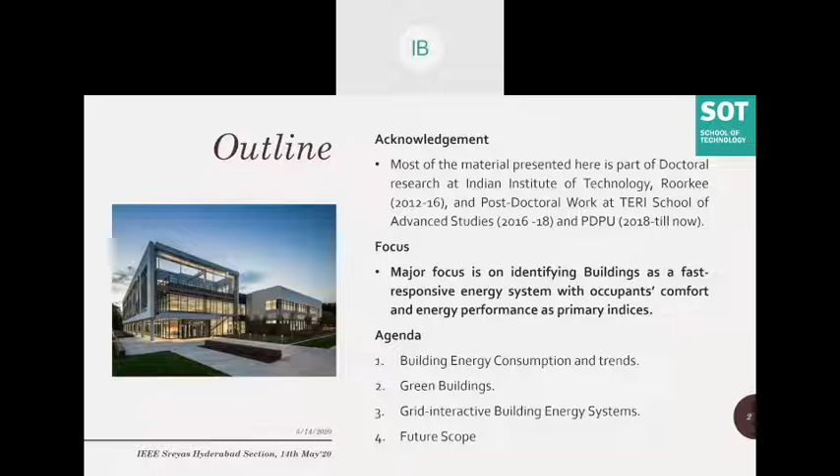I shall be focusing on how the buildings as an entity be regarded as a responsive entity to regulate power in an electrical power system. We shall look into the energy usage trends for building sector, buildings as an energy sector, from the reports published by several agencies like Union Ministry of Power, Bureau of Energy Efficiency, TERI, MNRE, so on and so forth.

Now, from this, the statistic majorly shows that the buildings, along with the construction sector, accounts for nearly 40% of the total energy-related CO2 emissions and about 36% of the final energy use worldwide. That means that the buildings as a sector offers the largest cost-effective greenhouse gas mitigation potential with net cost savings and economic gains possible through the implementation of existing technologies, futuristic technologies, policies, and also the building designs.

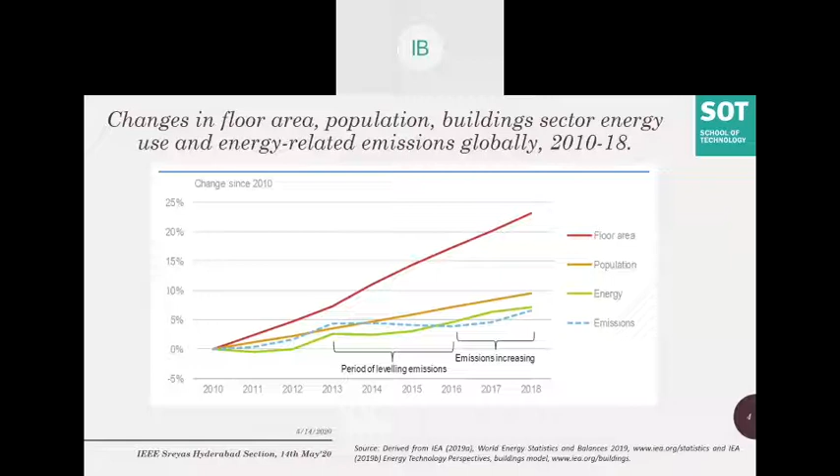Now, a major source of rising energy use, and also hence the GHG emissions by the global building stock, is electricity, the use of which has increased more than 19% since 2010, generated majorly from coal and natural gas.

This is why we have put this figure. It indicates how crucial it is to make clean and renewable sources of energy accessible when it comes to buildings, and also to use passive and low energy designs more widely in the building sector.

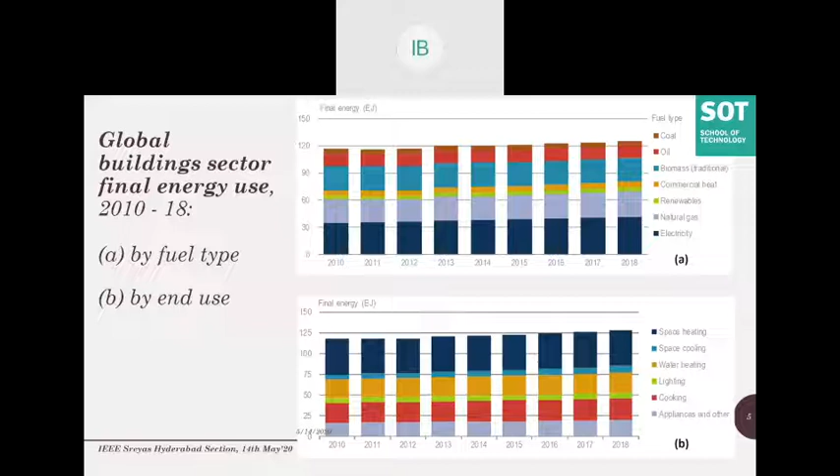Renewables include solar thermal technologies as well as modern biomass, for example wooden pellets and biogas. Hence the traditional biomass and renewables are shown differently here.

Now from 2000, if we see here what services have been asking for more energy usage, electricity usage, from 2017 to 2018 the energy intensity continued to improve for space heating and lighting, but increased for space cooling and remained steady for water heating, cooking, and appliances.

With around an 8% increase in 2018, space cooling became the fastest growing use of energy in buildings since 2010, though it accounted for only a small portion of total demand at 6%. That means space cooling requires us to look into the air conditioning aspect.

Globally, greater end-use energy consumption due to significantly higher electricity use since 2010 for space cooling, appliances, and hot water is resulting in increased GHG emissions also.

Although space heating, water heating, and cooking continue to be the primary energy end use demand in the buildings energy sector globally, the fastest growing end uses are still space cooling, appliances, and other pluggable loads.

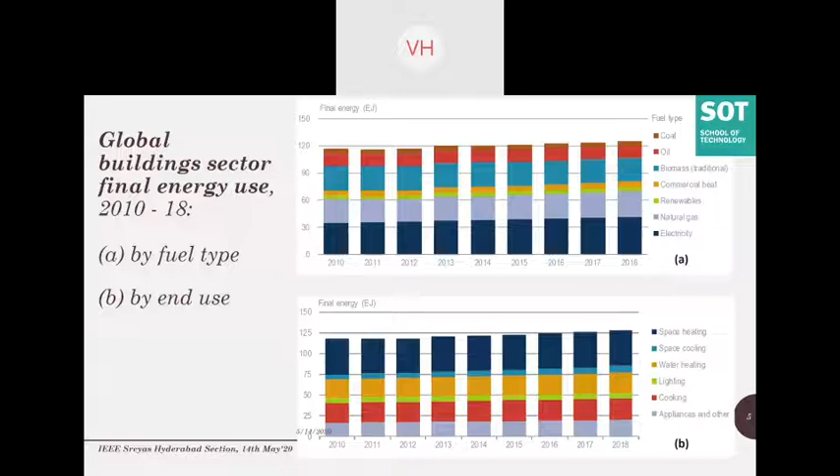Now, owing to technological improvements, which we see in advertisements as well, and also policy supports, technologies are coming at handy, and costs are also reducing as per the market. Energy Efficiency Services Limited (EESL) has also been working extensively in getting energy efficient products to consumers, especially in rural areas as well.

The overall reductions have been made in energy intensity for space heating, lighting, appliances, cooking, and water heating. This means that energy efficient green building systems and also building designs and envelopes continue to limit growth in both residential and non-residential building energy use.

So what we have learned so far: first, that the building sector accounts for around 36 to 40% of total energy use and 30 to 35% of total GHG emissions.

Second, these energy use and emissions are increasing. Third, such increases were driven by strong floor area expansion and population expansion and the improved standard of living, while efficiency improvements are continuing, but they are not adequate to outpace the demand growth.

Fourth, out of all the services a building can provide, space cooling energy intensity has increased as a result of greater cooling demand in hot and humid regions. Fifth, lighting demand has increased due to increase in floor area.

So the two major services, or the equipment and appliances that need to be worked on, are the heating, ventilation, and air conditioning system, which is HVAC, and the lighting system and pluggable loads. Now we will jump into the green buildings aspect.

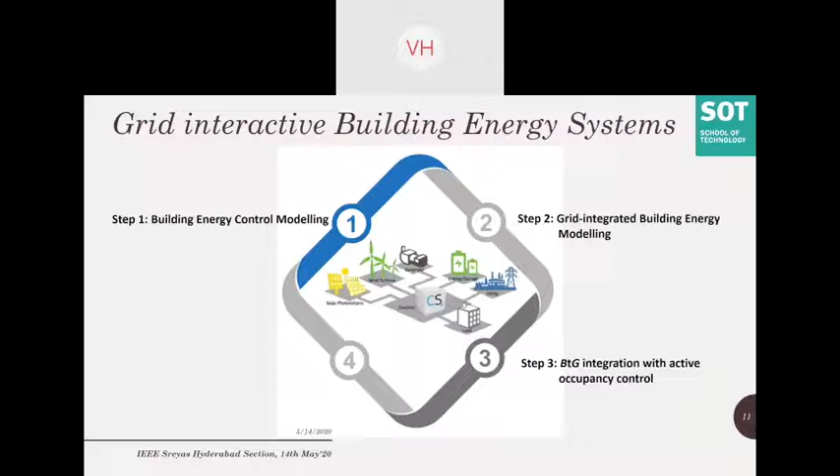Development of building energy models are of three types: one is white box modeling, second is black box modeling, and third is gray box model. Any energy system mathematical model is developed using some mathematical equation which governs the behavior of that system.

You take some input variables, categorize those variables as controllable and uncontrollable, give it to the energy system, and see the response or output. A white box model means you know each and every part, sub-part of the system you are developing. Each and every transfer equation is there, and you use detailed analytical tools to solve the models and get the output.

Black box models are what undergraduate and postgraduate students do in laboratories doing experiments. They don't know about the system, they only know there is a box. You give certain inputs, do experiments, change the value of inputs, develop a table for outputs for those inputs, use regression or other data analysis, and get the equations of the model. That model is called a black box model, hence the name black—meaning you are not able to see anything about the system.

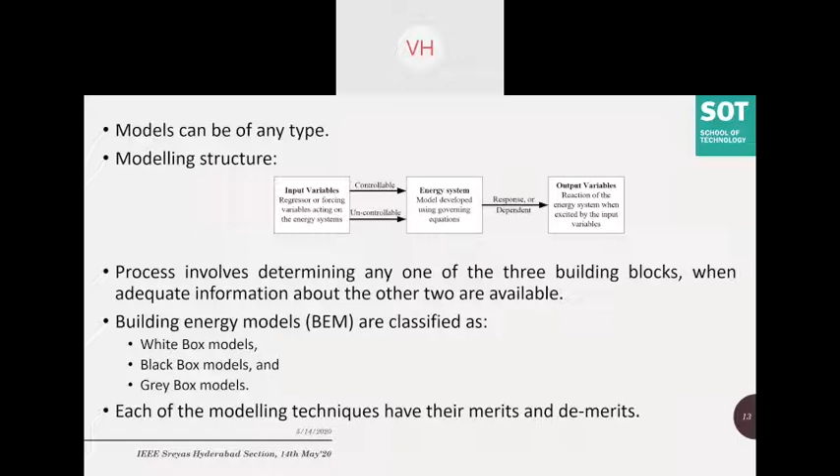It's not that we don't have simulation programs. We have simulation programs, softwares available, both open source and commercial building energy simulation software. Selecting a building energy simulation program depends majorly on the functionality of the building energy study.

If the software is used to design a residential building, is it single zonal or multi-zonal, a commercial complex, a municipal building, a library or a gym, and so on. Also important is how many times you have to use it—the precision of the model—and how much experience the modeler has. For example, I may have experience with certain software, and I want to replicate the same knowledge in other simulation software, depending on how experienced I am.

Also relevant is what hardware and controlling techniques are used—maybe connecting it to a Raspberry Pi board or Arduino board, or to the Internet of Things (IoT). There are very famous energy simulation programs: Energy Plus, eQuest, ESP-r, TRNSYS, and we can use other mathematical simulation softwares if we want to develop white box models, such as Python and MATLAB, and so on and so forth.

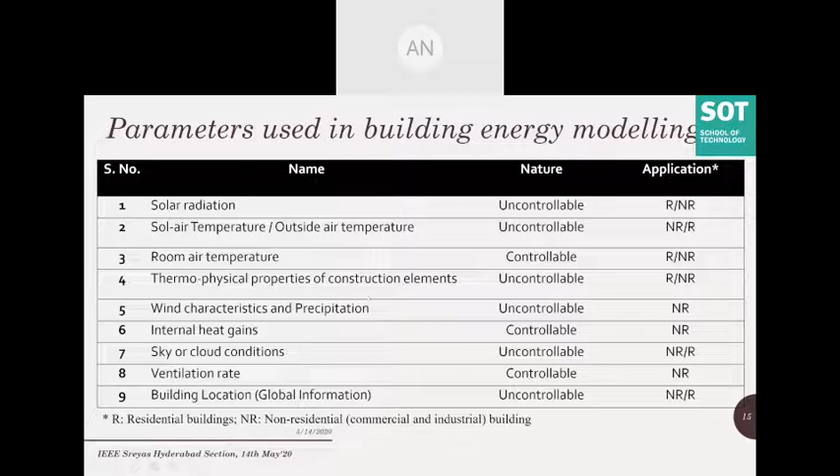Now what I have done is I have used electrical networks, resistance capacitance networks, simple networks which you must have studied in your network theory first or second year course. I have taken temperature to be analogous to voltage and heat flow rate to be analogous to current. Why? Because by natural law, heat flows from a higher temperature region to a lower temperature region, similar to electric current which flows from a higher potential point to a lower potential point. This is the law I have used to develop the thermal electrical analogy and hence the network.

It's not that models are not available. Literature gives us models, but there are certain gaps that I have identified. One of the major gaps has been in structure and accuracy. One major gap has been in parameter selection and its influence. What happens is, because of the gap between the mechanical, electrical, civil, and architectural parts, if we are developing an electrical control system, the models we use are single order models because they are easy to model and get very fast response.

But it loses accuracy. For parameter selection, what we have done is the values of R's and C's, resistances and capacitances, have been equally and uniformly divided depending upon the total thermal resistance and the total thermal capacity.

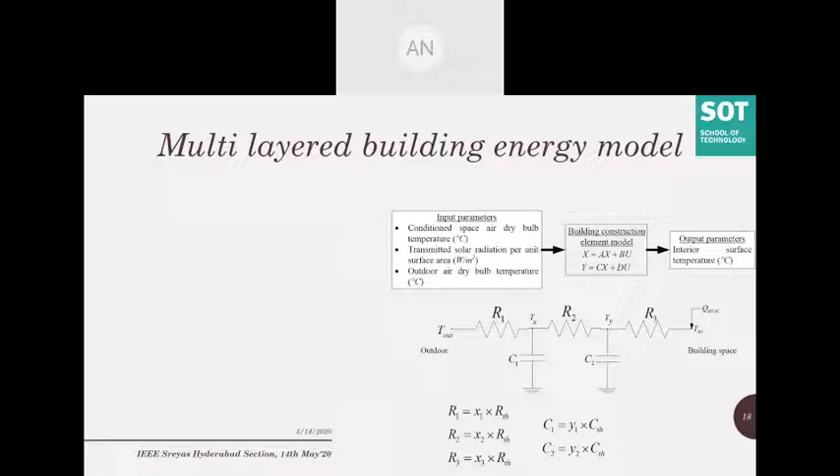What building layer, multi-layered building energy model I have developed as a second order model. As you can see, if you develop the ordinary differential equations, this is something you would have studied in your third semester numerical methods as undergraduate students. It's pretty easy. What we have done is for one building wall,

it's only one wall, one construction element. We have modeled it as a 3R, 3 resistance and 2 capacitance model. The values of these resistances are fractions of the total thermal resistance and total thermal capacitance. Total thermal resistance depends upon the physical property of the building construction element. Similarly, total thermal capacitance depends upon the thickness, density, and specific thermal capacity of the particular layer. As I said, layers can be thermal insulation, brick, air gaps, and also thermal paint or insulation.

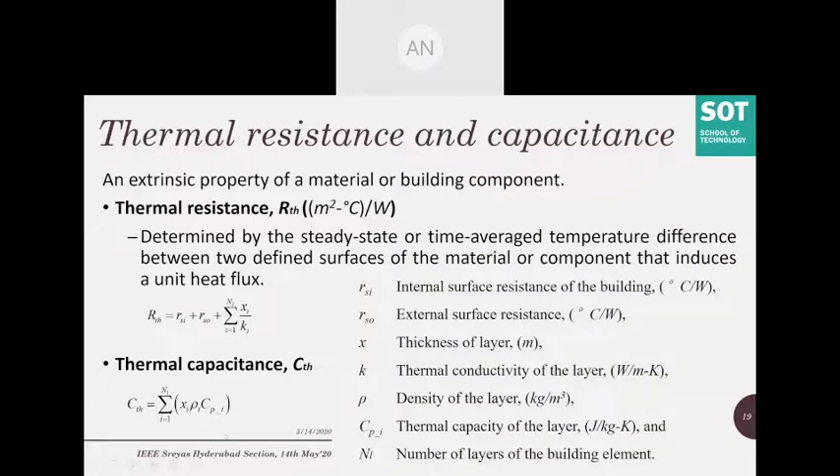Now, what I have done is I know the value of RTH, which I can get because the architect will give me all these values. So I know the RTH value, I know the CTH value.

I just want to know the X's and the Y's. Now, as I have already outlined in the gap, it's easy that I make this as 1 by 3, 1 by 3, 1 by 3, and Y as 1 by 2, 1 by 2. But this does not replicate the complete behavior of that construction element.

So what we have done is we have developed an optimization algorithm that would give us the fraction these X's and the fraction these Y's. Now, having developed a building wall model, the same approach is used for other walls of the building, depending upon how they are exposed to the outdoor environment. It is imperative that we develop a model for a heating, ventilation, and air conditioning system.

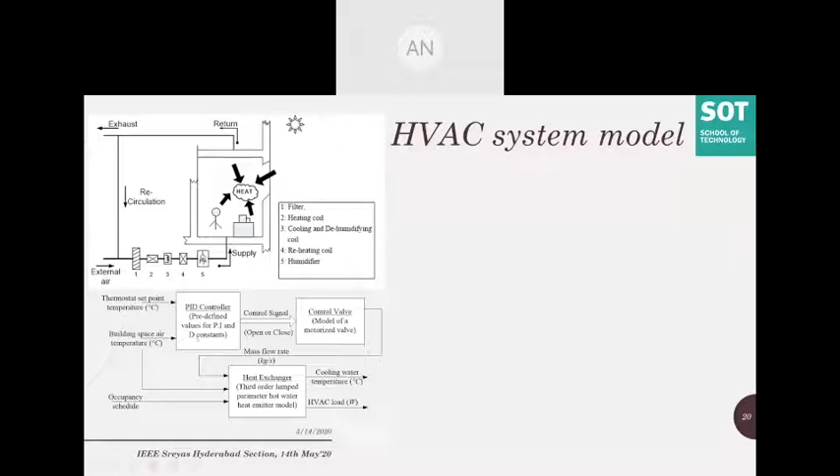The model that I have worked on is a heat exchanger third order lumped parameter model and a control valve model. And the control is being controlled by the signal given from a PID controller. The PID controllers are traditionally used and still now they are being put in use. The only thing is how you are tuning the values of KP, KI, and KD is depending upon the artificial intelligence techniques or the techniques that are being used nowadays.

I have used the traditional method, and the output that I am getting is, as you can see, the HVAC system will give the building space ventilation and infiltration air change rate. This is nothing but a mathematical expression which will tell me how much cooling with good ventilation can be provided out of an HVAC system.

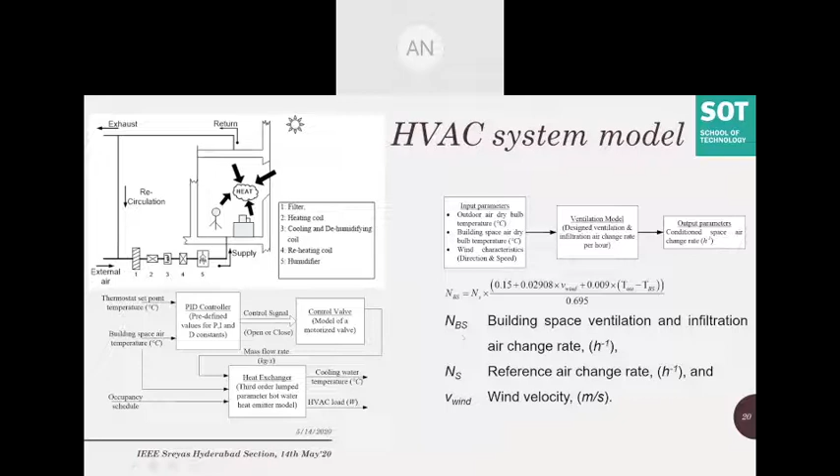So what I have done is we didn't do any experimental hardware analysis, but I have taken the ASHRAE, American Society of Heating, Refrigeration and Air Conditioning Engineers Handbook. I have taken a test case. These are the parameters that I have taken. They have test cases, and this is the parameter that I have taken for the HVAC system and developed my model.

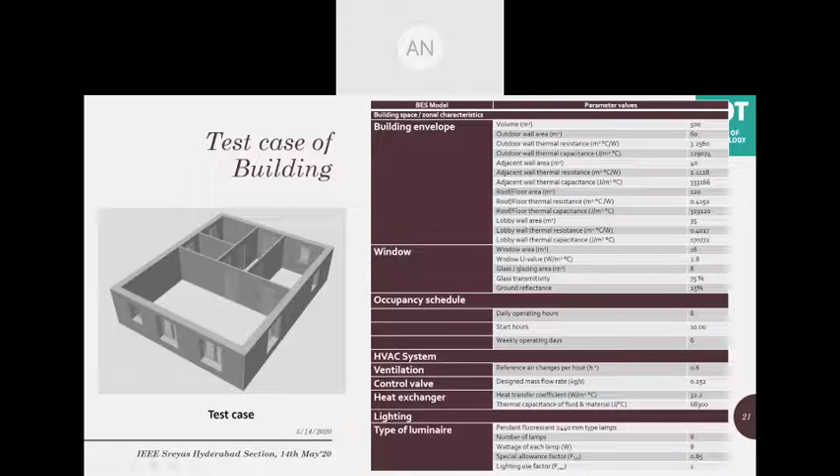Now for a white box model, I have used finite difference formulation for a single dimensional Fourier heat conduction equation. I have used the Crank-Nicolson method, which uses the central difference scheme to solve this model.

This is a white box model. This is a larger order model and requires a larger computational demand. This model is reduced to a second order model, and as you all know, a second order 3R2C model is widely used.

Because we know we can get the performance characteristics in terms of peak time, settling time, rise time, maximum overshoot, and the steady state error. That means we can give a step input, impulse input, ramp input, or sinusoidal input, depending upon what you want to model and get the outputs. And that's why I have chosen the second order model.

How much time do I have left? Sir, you have 23 more minutes. How many minutes? 23 minutes, sir. Okay, thank you.

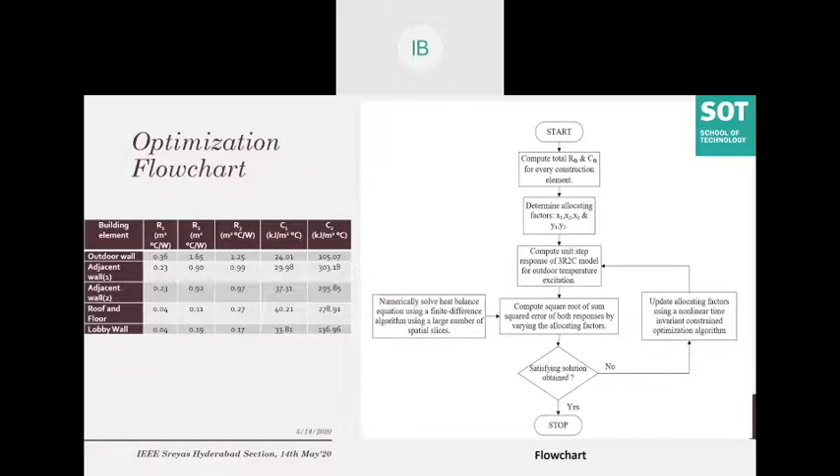Now the optimization algorithm, which we have modeled, takes into account the error function. What I will do is I will give an input here. I don't know the value, so I will start with a guess value of x1, x2, x3, and a guess value of y1 and y2, and get the values of r1, r2, r3, c1, c2 from these expressions.

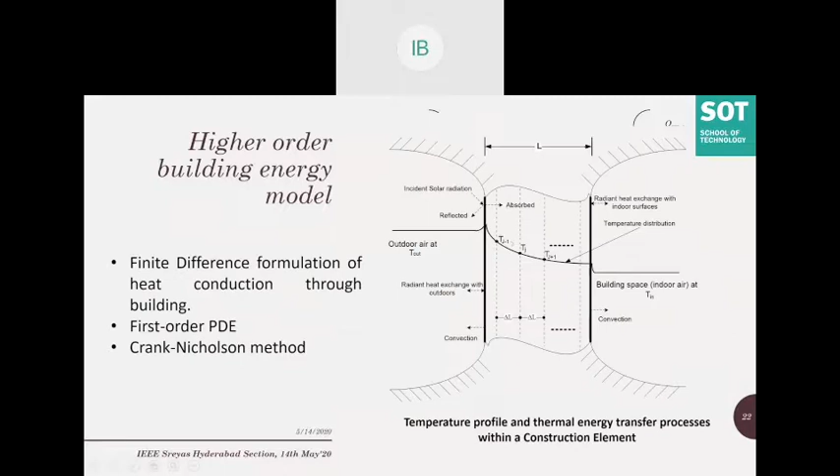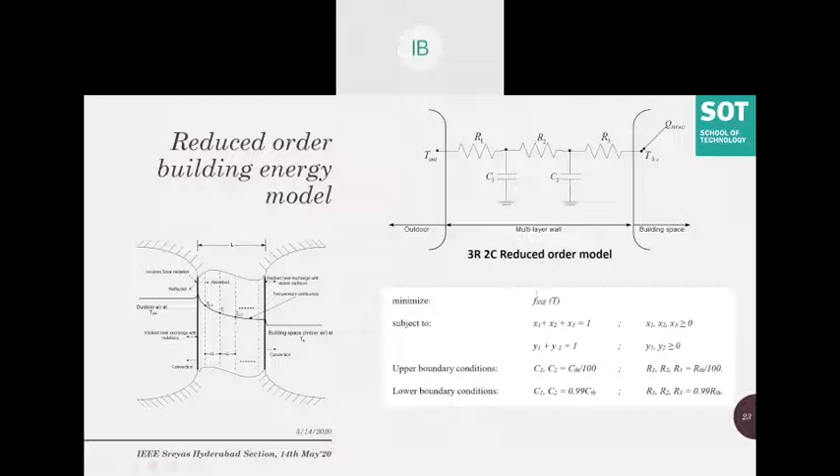And then the same input will be given to this model. The output will be recorded here. The outputs of both the models, the square root of the sum squared error of both the outputs, will be taken and reduced by taking into account an optimization algorithm.

Now that optimization algorithm has fetched us, for my building model, all the values of R's and all the values of C. Actually, it has fetched x1, x2, x3 and y1, y2. Multiplying that for a particular RTH that I have taken from the ASHRAE Handbook of Fundamentals, we get the values of R's and C's. Now this algorithm I have done for one wall, mind you, this is for one wall.

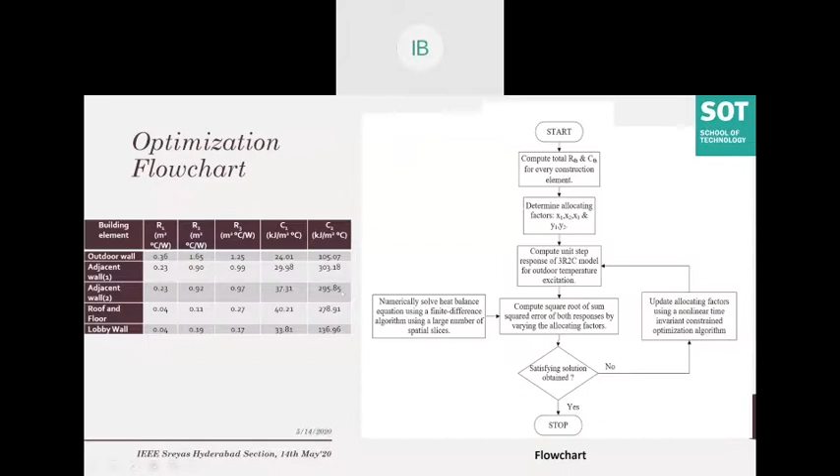So one second order model is for one wall. And as I request you again to look around, you know that you are sitting inside a cuboid like this, with a couple of windows and solar radiation.

And that means that we have a 3R2C model. A 3R2C model for a roof, for an external wall, for a lobby, for a floor, for two adjacent walls. And a window I have taken as a purely resistance and a single capacitance model, because a large amount of solar radiation comes inside due to the glass effect. And an internal mass, meaning computers inside, occupant-based equipment which would contribute to the thermal mass inside your building, and a capacitance of the air. So this would give us the temperature of the building space inside the room that we are sitting.

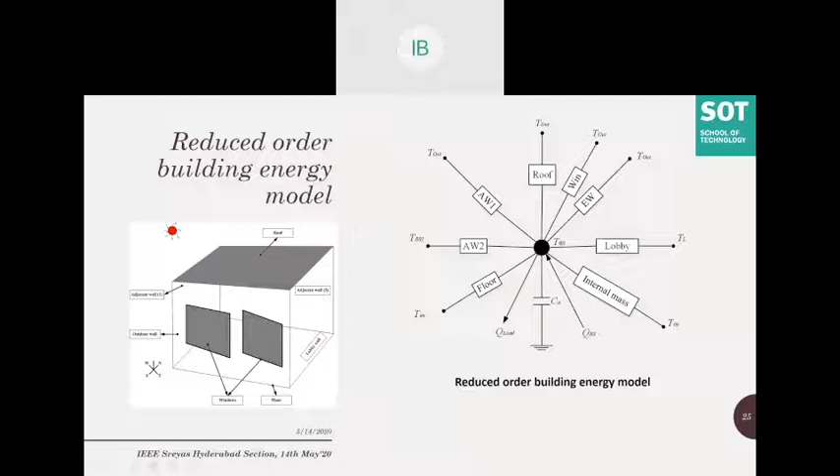Now, having developed the model, I have run it for one month, for one summer season, for one winter season, and also for one year. And I have calculated the energy consumption for all these time parameters that I have outlined.

Now it's time that we develop comfort analysis. I've taken into account the thermal comfort, which is dependent upon the indoor air temperature; the visual comfort, which depends upon the lux values or illumination level; and the indoor air quality, which depends upon the ppm concentration of CO2. The formulas I have taken are empirical, as I told you—no experiment was carried out. These are empirical analyses taken from the ASHRAE's book, and I have calculated the overall comfort of the occupants inside the building space that I have modeled here.

Similarly, I have calculated the energy consumption analysis. Now, the major point here is it becomes a multi-objective optimization. Why? Because you want to minimize the energy being consumed by the lighting system and by the HVAC, but without jeopardizing the comfort of the occupants. This is where the major scenario comes in.

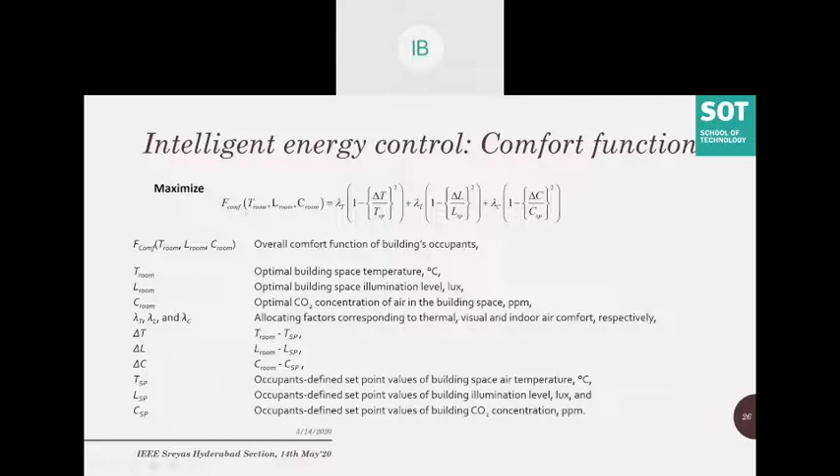If you would see, I have modeled the occupant's comfort inside the optimization algorithm as a discomfort model. So it becomes maximization of comfort, which becomes minimization of discomfort, and minimization of energy. You could see that we will get a Pareto front solution, because whenever you model a multi-objective optimization algorithm, there will never be a single solution—there will be sample solutions that we get.

For sample solutions, you can provide them to the consumer, and the consumer itself will take into consideration: okay, now I want more comfort, so my setting will be this; no, I don't need much more comfort, so my setting would be this. That means, just as we have a regulator for fans, can we have a regulator or controller that would control the thermostat setting, the illumination index, and also the CO2 concentration?

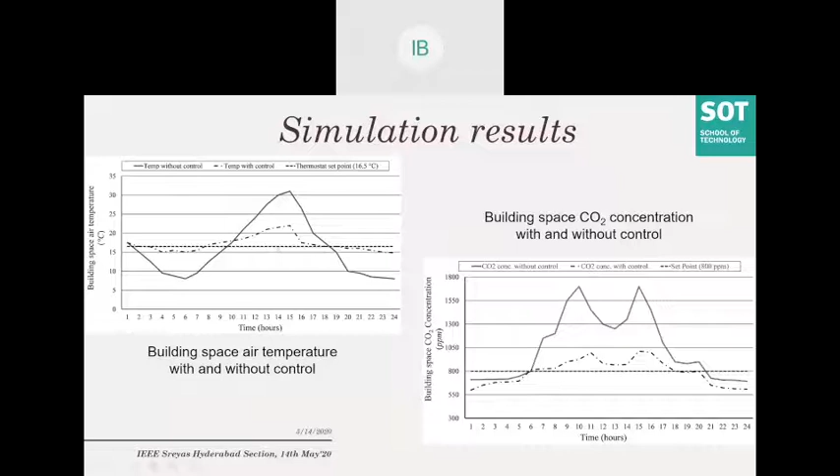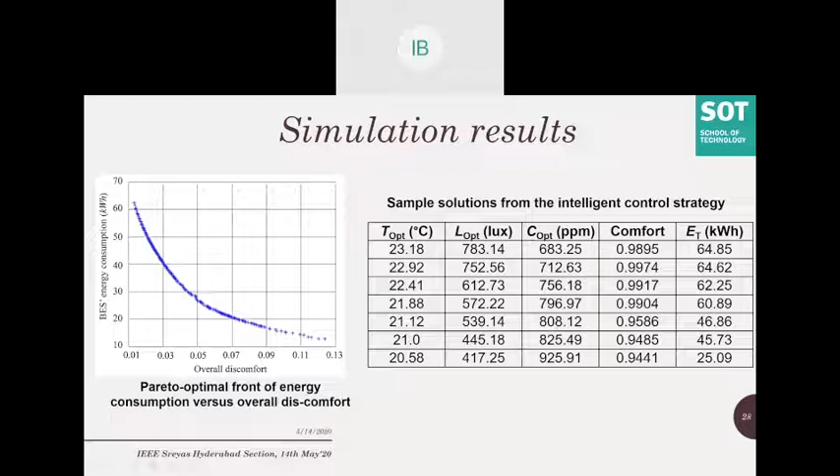In the afternoon, the thermostat setting would be different. In the night, or late night, it would be different. Similarly, the illumination index I have taken as constant, but if your room is large in volumetric space, these parameters cannot be constant, but would vary depending on the specific location of your building. This becomes one research area where I am looking for good students to work on.

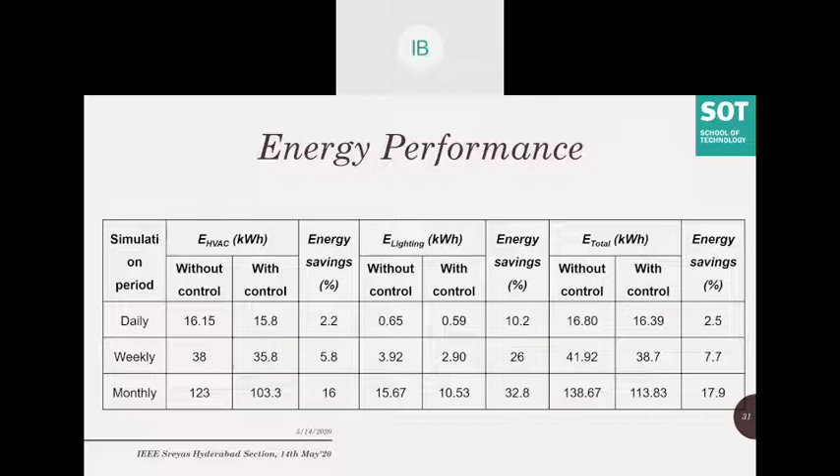Now, same thing I have done for the saving analysis with control versus without control. As the time frame increases, the percentage saving is also increasing. If you do it for only daily, you get very low energy saving percent. This means that with a controller, the payback period would be a little more than a day—you would not get profit only within a day or a short period of time.

Having modeled a building energy control system, as I started with the previous slide, there are 4 major steps. One step was how you would take this model and interact with the electrical power grid. What we will do is take into account the swing equation, which you will study in power system analysis, maybe in your 5th or 6th sem of undergraduate study, or the first year of postgraduate study.

What we can do here is develop a cluster of building models—this will be for one building, then there will be a cluster of buildings. You will get certain loading aspects, electricity aspects, for every building, for every hour. You put this into the swing equation and see the dynamics of the electrical power grid. This is a very famous swing equation, which you already know, and that's how you can develop a grid-interactive building energy system.

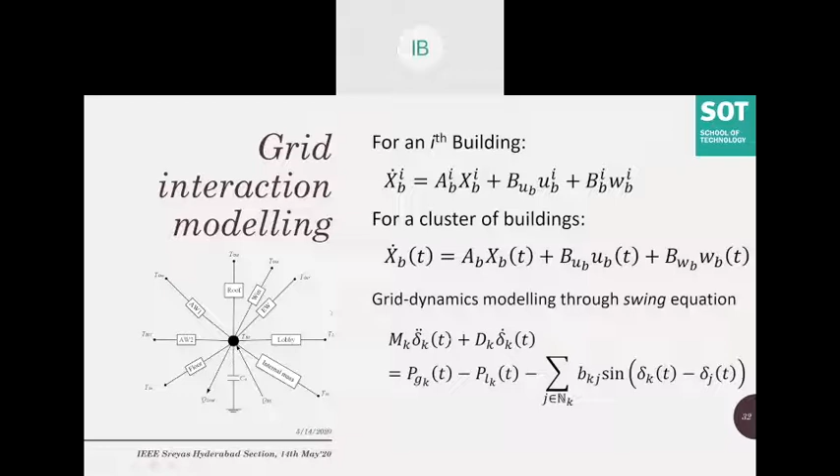Now let us look at this aspect. I just came to know from one of the moderators that yesterday the IEEE Sreyas section had a very good lecture on blockchain, which gave us the peer-to-peer communication aspect. I would not say blockchain is an ideal technology to use right now, but the concept of peer-to-peer energy sharing and trading can be looked upon.

We have certain buildings which have solar PV panels installed, and certain buildings which may not install solar PV panels. This happens usually for 2 reasons. One, a good solar profile is not coming—maybe the building's orientation is such that within a day the number of sunshine hours is pretty low, or shading comes in, or the economics doesn't approve the building owner having rooftop solar PV. But how can you make the consumer participate inside the green renewable energy aspect? If this electricity consumer can consume electricity generated from solar PV, we could regard them as a green energy consumer, and that's where a peer-to-peer model comes in.

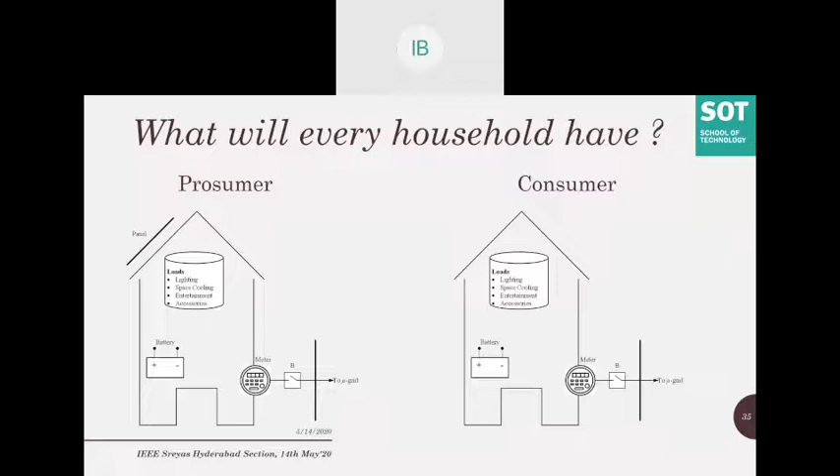Now, the household loads that I have taken are the services that I have bifurcated for rural households. These are lighting and entertainment purposes, white applications, heating and cooling. This has come from my own research, interviewing so many people for a couple of years, that entertainment becomes one of the major, primary aspects for households.

Yes, they would say that at night they would not require lighting, but for charging we need mobile, because we would want to watch movies, watch YouTube videos, develop some TikTok or YouTube videos, and yes, they require entertainment. So that means I have to give them a USB based charging port for their mobiles, and that's why this has been taken.

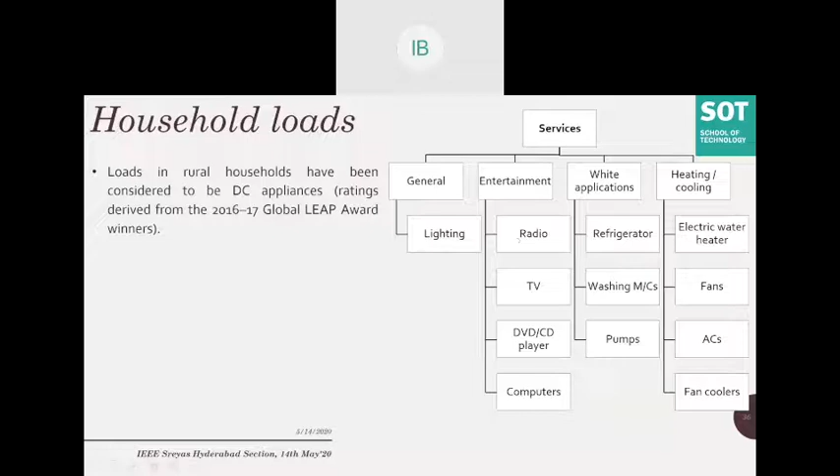Now, what lies in the future? What I'm looking into the future is consumer willingness. What I'm looking at is how much.

See, the peer-to-peer energy trading model one can develop should give the consumer the liberty that when the consumer wants to come out of the system and get into the system. Maybe I don't want to participate in peer-to-peer sharing. Maybe for summer holidays I am going out for 2 months, for 1 month. Maybe I don't want to do it.

So what mathematical indexes and artificial intelligence techniques can I make use of, where I can learn about the consumer willingness? What are the forecasting studies both for demand and for renewable energy sources? What are the planning pricing strategies that I have to take into consideration?

Should this system be owned by a centralized P2P station, or should it be owned by the electrical utility, distribution utility, DISCOM, or should it be owned by the user? What it should be, and what should be the strategy of the planning? Can this become one microgrid and other microgrids can participate in peer-to-peer, and how can it be? That is also one aspect that can be looked upon.

Can my model fail? What I am saying right now, whom to validate, how can it be validated? And all these aspects lie in the range from the undergraduate project study up till the PhD postdoc research study.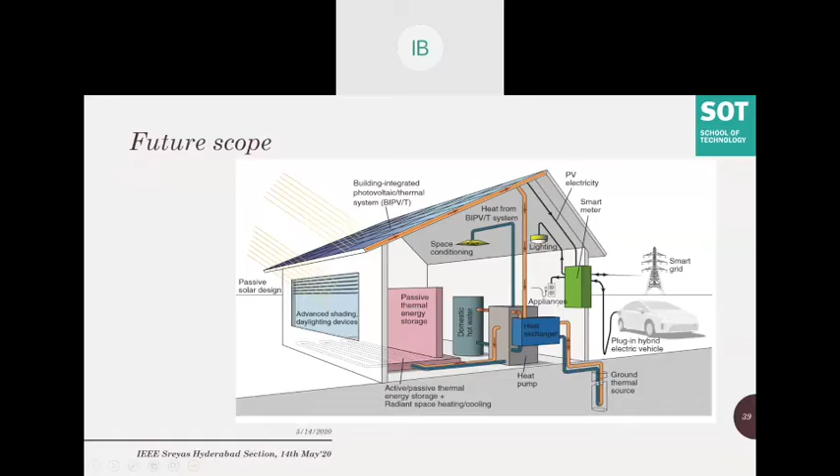simulation-based tool to evaluate both the technical aspect, the social aspect, that is the consumer willingness, economic aspect, business model of consumer-based energy systems, and to assess the energy and also the environmental aspects of building.

So the energy institutions which all of you can look upon, which are working on this aspect of building energy systems and grid interactive building energy systems, are our governmental ministries. If you go through the website, they will have a dedicated building energy efficiency option, which you can see. Apart from this, there are certain autonomous institutions which are trying to work on and developing reports, doing market studies.

Funding agencies, and there are certain research institutions like PDPU and other IITs, energy institutions, energy trading indexes, which are working on the algorithm, the trading aspect, and there are certain institutions which are MSMEs also, which are NGOs also, which are working here.

So in the Department of Electrical Engineering of PDPU, we have different research groups: renewable energy systems, power systems operation and control research group, power electronics and drives research group, where we make use of simulation software like MiPower, MATLAB, ETAP, DSpace, LabVIEW, PSIM, PSCAD, and work towards renewable energy based, artificial intelligence based power systems.